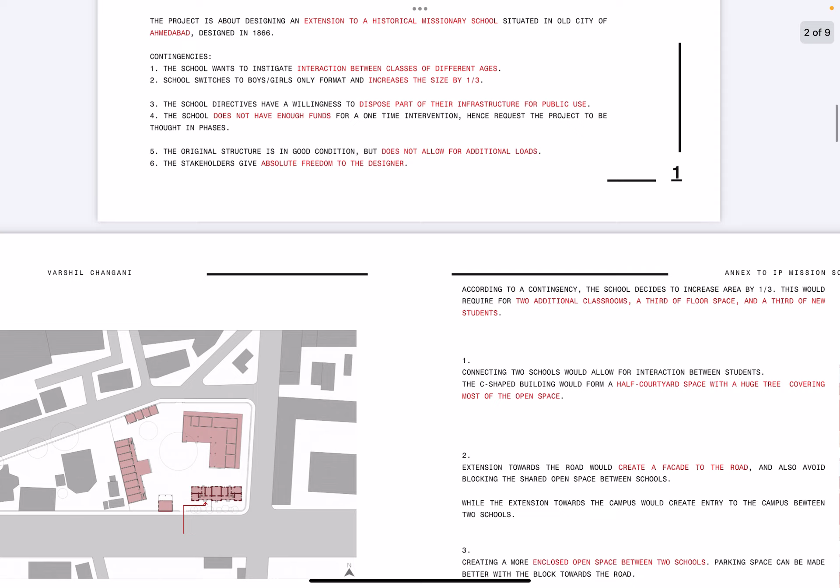Third, the school directives have a willingness to use part of the infrastructure for public use. Fourth, the school does not have enough funds and requests the intervention to be thought in phases. Fifth, the original structure is in good condition but does not allow any additional loads. And sixth, there is absolute freedom given to the designer.

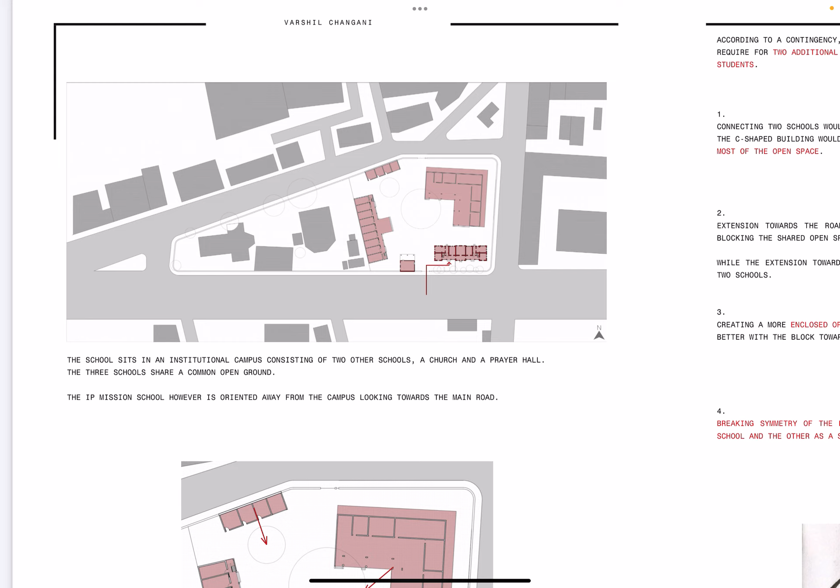Moving on to the current urban conditions, the school, as it was made very early and the campus grew around it later, does not face the campus and opens up to the road. The entry to the school is also such that children need not go through the campus to reach the school. This isolates the school in a way.

A few options were looked at for placing the extension in the campus, looking at the positives and negatives of each. The second option was taken further as one part opens up to the city while the other opens up to the campus.

The design of the extension was initially thought to be just extending the roofscape and creating semi-open spaces which can be used for various purposes, and to break free from the rigidity of the existing building, which reflected strongly even on the pedagogy of the school.

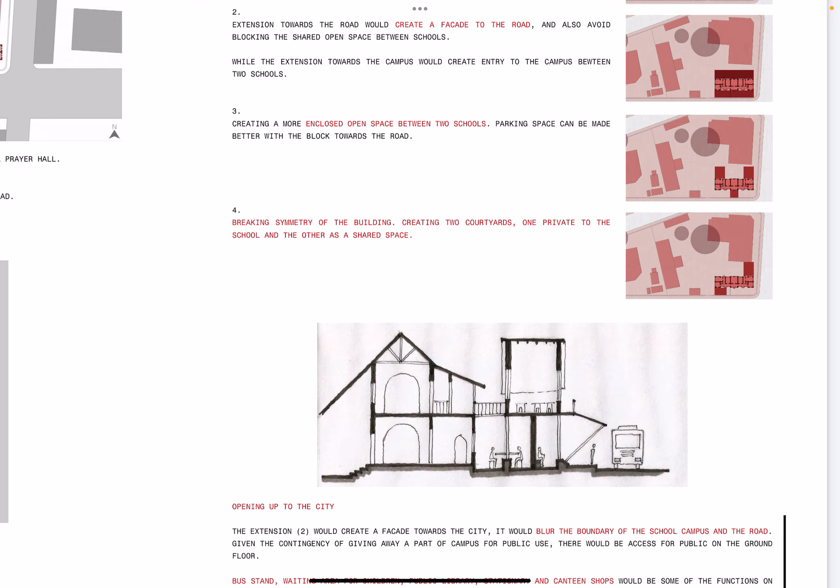Functionally, the front extension would have public activities like a waiting area, bus stand, shops, and canteen, which would start generating income for the school and help in realizing the entire intervention. The back extension would allow for the weekly market to be held on the ground floor and classes on the upper floor. It would also act as a bridge connecting the other school in the campus.

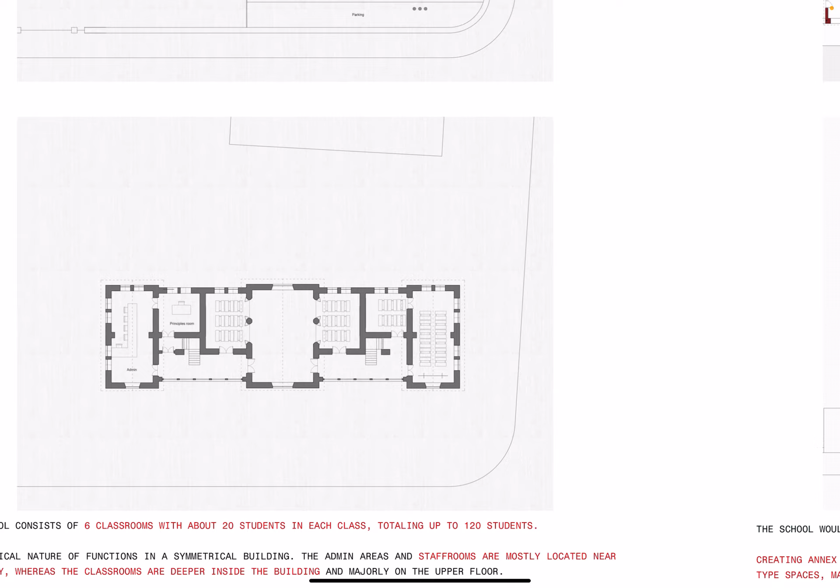Looking at the demographics, the current building has six classrooms ranging from standard 9 to 12, and four staff and admin areas and one principal's office. This school is symmetrically built in nature, but the way it is used is asymmetrical. The admin and staff areas are closer to the entry, and the classrooms are further away.

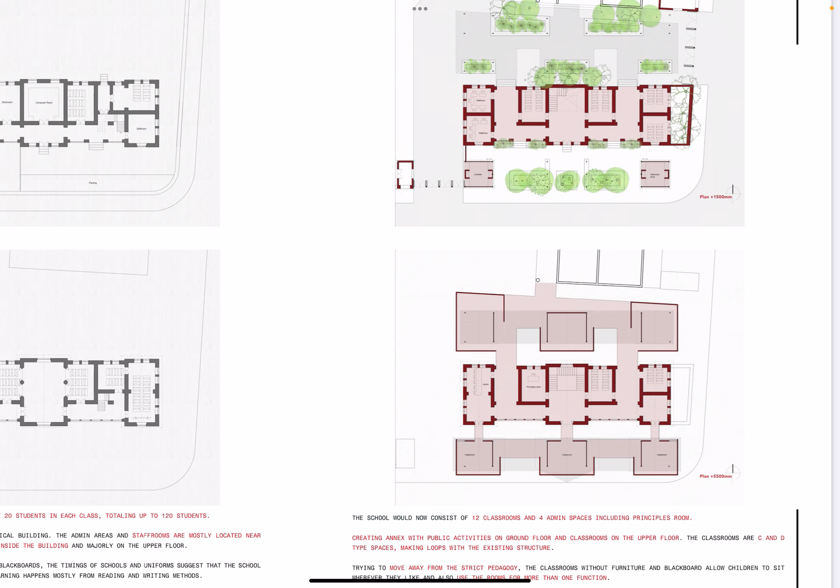Looking at the school, it would now consist of 12 classrooms and 4 admin spaces including the principal's office. Both the extensions would cater to public activities on the ground floor and classes on the upper floor. The nature of the new classrooms is open and lacks any fixed furniture. These classrooms would also be used for various other activities.

Moving on to the structure of the existing building, it's a brick masonry load bearing structure, and it gives a notion of heaviness and sitting on the ground, to which the intervention would contrast by creating a light metal frame on the ground floor and taking up the classrooms on the upper floor, which are more enclosed, while the ground floor is more open.

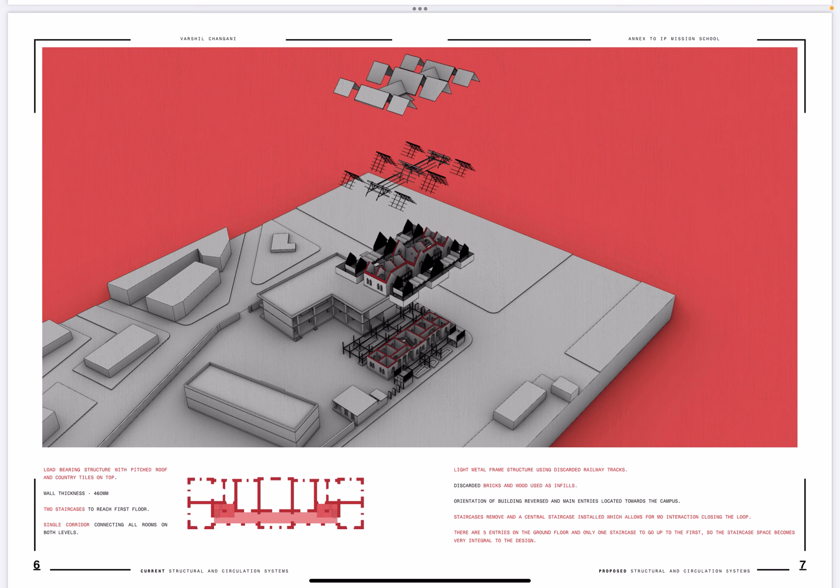The materials used are part of a metal frame structure, and the materials used are discarded railway tracks, discarded bricks, and old wooden planks.

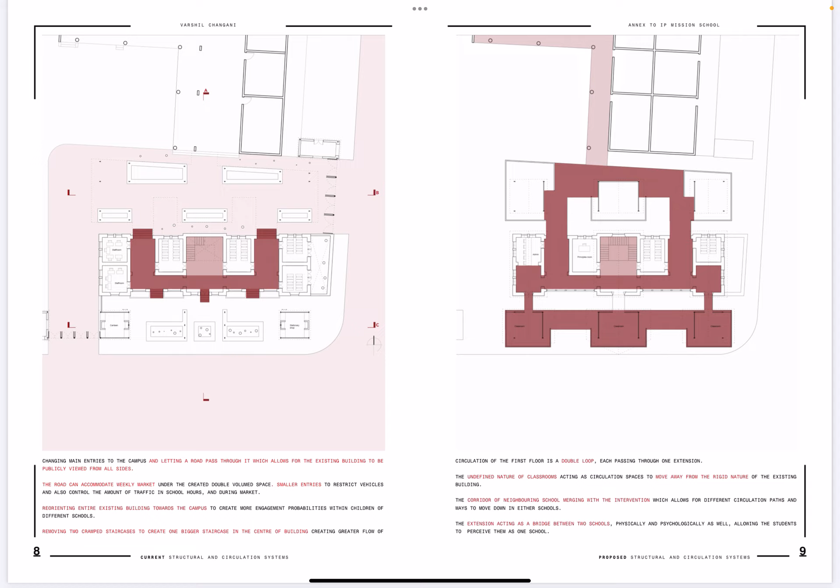Moving on to the circulation of the building, it's completely changed, and the orientation of the building is now towards the campus in terms of circulation.

Removing the two cramped staircases from each side of the building and creating a central staircase in the center would allow for greater interaction between the students, and even the classrooms with multiple entries increase the probability of chanced or accidental interactions inside the school.

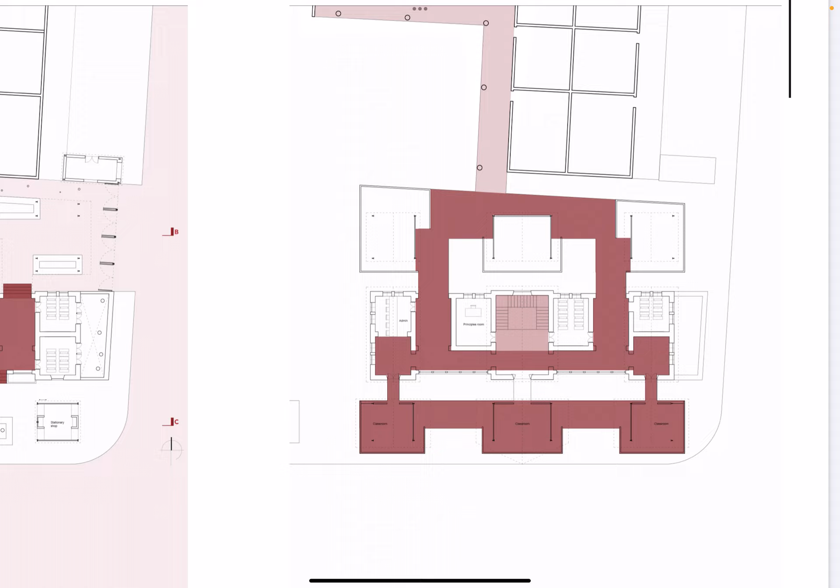The upper floor has a double loop circulation system where the classrooms themselves act as a circulation route, and this upper floor also connects the existing building with the other neighboring school.

The overall idea of cradle to cradle germinated while addressing the contingency where the school does not have enough funds. I decided to use recycled or upcycled materials procured while demolishing other buildings or in other ways. These materials include railway tracks, bricks, wooden planks, gas pipes, metal sheets, etc.

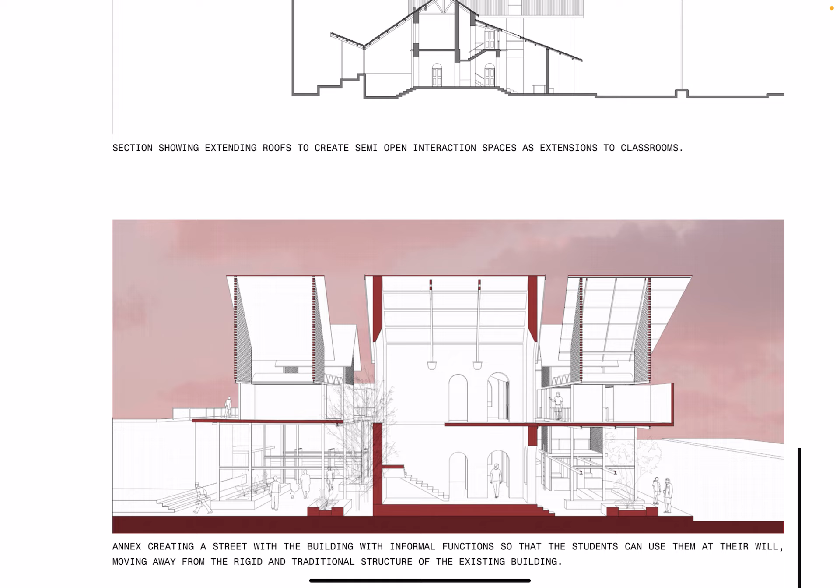With the contingency providing absolute freedom to experiment in different design ideas, the semi-open classrooms, as you can see in this section, with a peculiarly loose functional nature were created, taking design principles like classrooms having larger volumes and circulation spaces low in volume from the existing building.

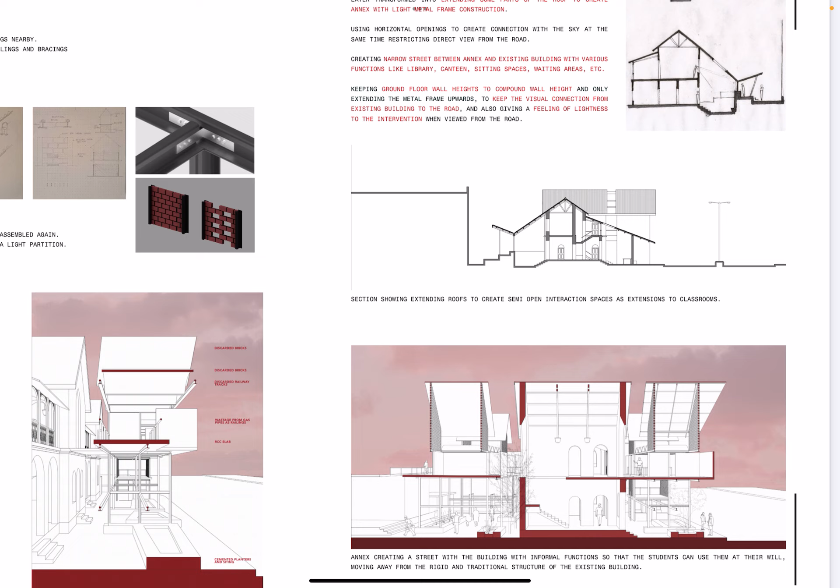The extension on the upper floor was created, while the lower floor was almost open, consisting only of the metal frame and a shop and a canteen, which also do not rise higher above the compound wall level.

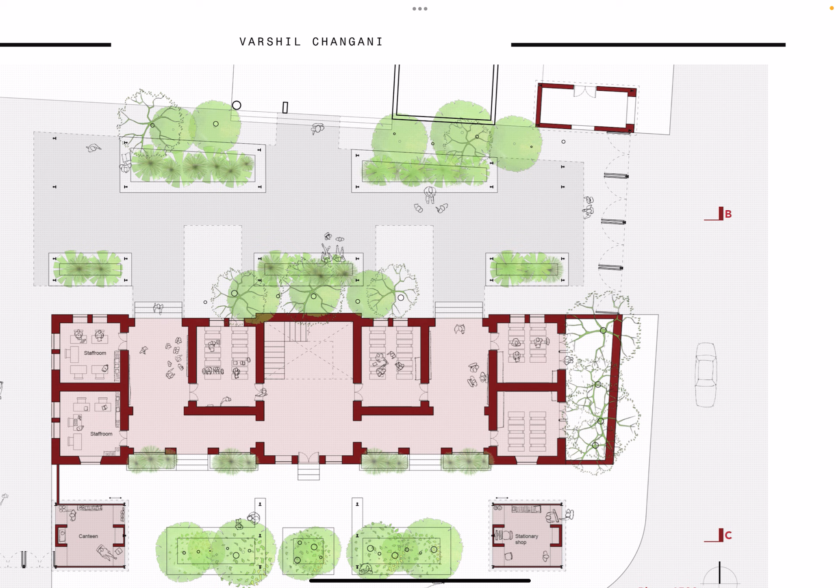Addressing another contingency of disposing a part of campus for public use, the shop and canteen already do that. Along with that, the front ground floor on the front extension acts as a bus stop or waiting area. Even the back extension's ground floor acts similarly, where there can be a weekly market held in the open plaza.

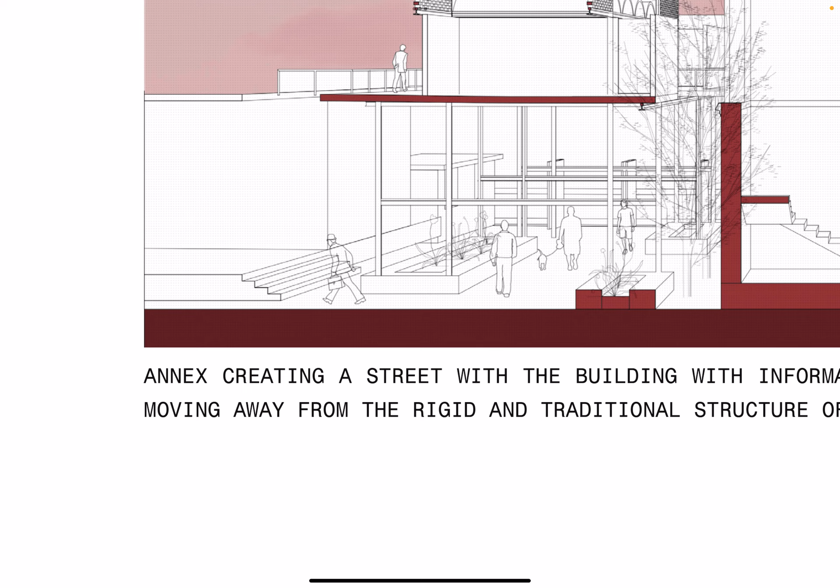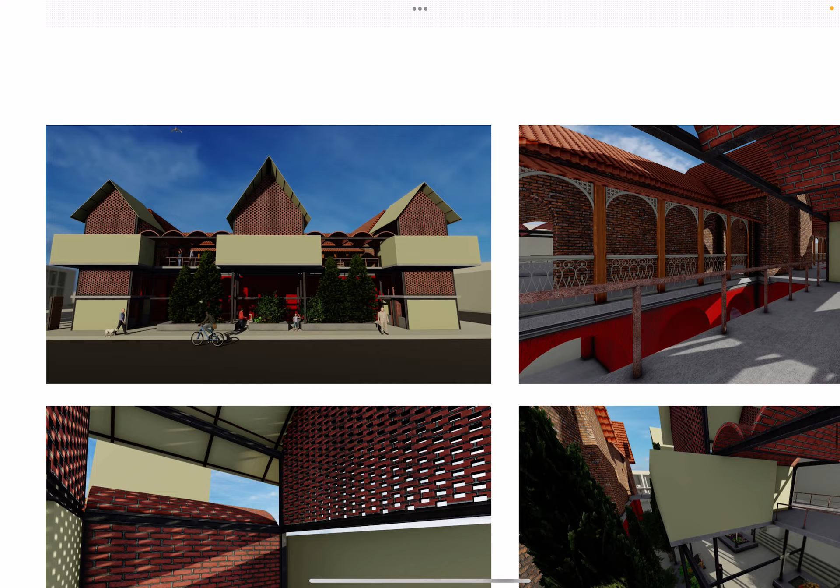The way the metal frame is situated, as you can see here in this section, allows for various temporary structures or stalls to be built. Along with that, the higher volume does not give a notion of an open space that feels cramped inside, and the plants and trees aid to that.

So these are the drawings and the views showing materials and finishes.

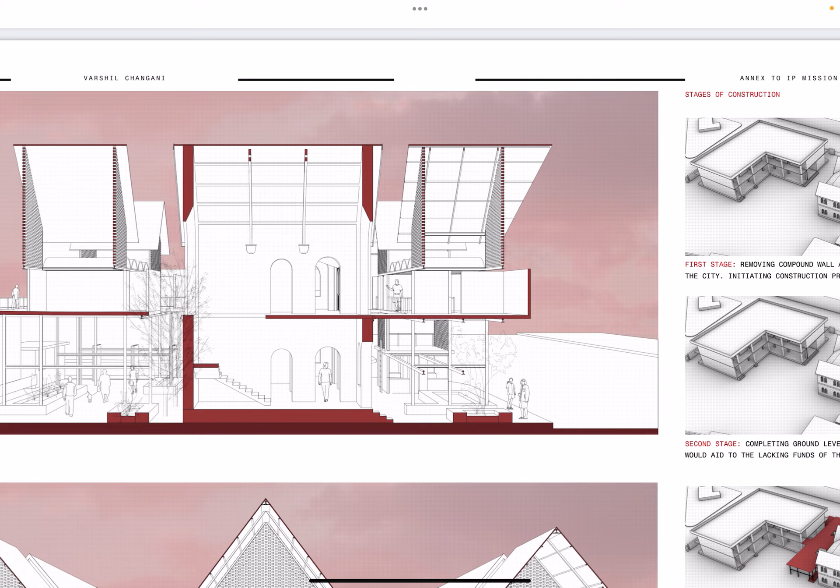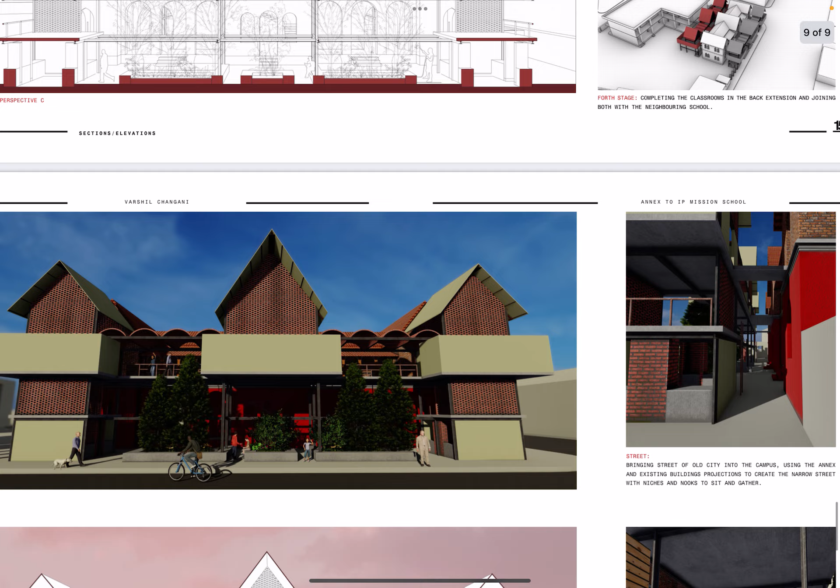On the ground floor, while the extension facing the road is completely open, the idea is to create a park alongside the road, which can act as a waiting area for students and parents, and a bus stop for the city, with a canteen and stationery shop defining the boundary of that area.

The gap between the extension and the existing school is such that there are a lot of nooks and corners, and with this kind of narrow gap between them, it gives a notion of an old city street, which is not far away from the building.

The school is thought about in phases, as one of the contingencies says, and the first phase was to create the ground floor of the front extension where the shop and canteen would be created, and they would start generating revenue for the school.

Later, the upper floor of the front extension is created, and the slab of the back extension is created with the metal frame and planters, which starts catering to the weekly market.

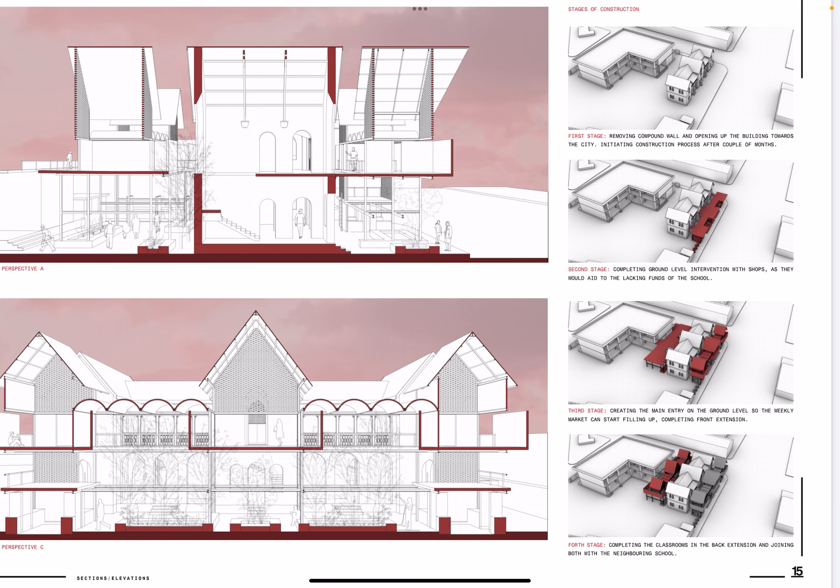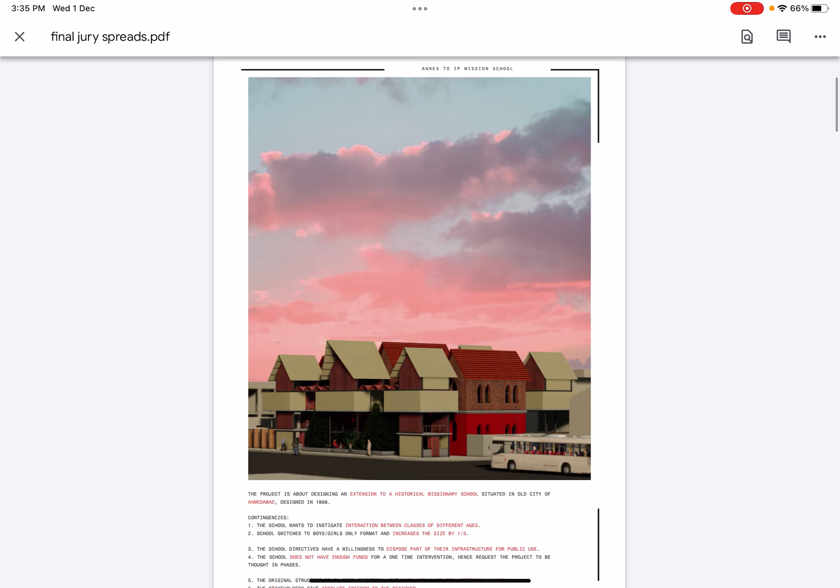And finally, the upper classrooms are completed on both sides, and now the back extension acts as a bridge between two schools. So this is how the intervention is thought about in phases.